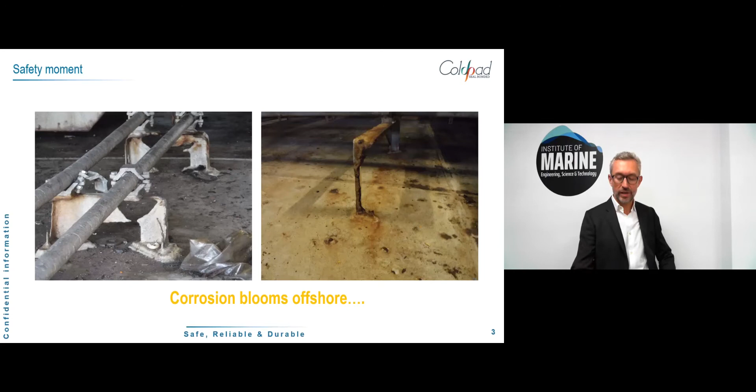First, let's start with the safety moment, which is purposely chosen to introduce our technology. It's about corrosion, and corrosion not in a simple place, but corrosion just above the crude oil tank of an FPSO. As you know, the crude oil tank stores crude oil. And if you need to repair it, it can be quite risky and quite a nightmare. So what to do in this condition?

You have different scenarios. The first one is you do nothing. A lot of our clients tend to do that, to postpone and procrastinate as much as they can. The good thing about that is it doesn't cost anything, but at one point it can be a bit tricky when the pipe is simply resting onto the deck, which usually leads to scenario 2, where you need to do something.

The classical and normal way of doing it is through hot work. So if you want to weld the pipe support onto a deck located above a crude oil tank, you usually need to empty the tank, clean the tank, and place some inert gas before being able to weld the support onto the deck. After that, because you've increased the heat, you need to do the paint touch-up at the top, but also inside. So you have to put in breathable air and send painters with scaffolding or rope access in order to get this paint job done.

The third option, the alternative, is doing it the cold way, meaning no hot work, and having a method which is reliable and acceptable to the industry to do it the cold way. And this is what we propose.

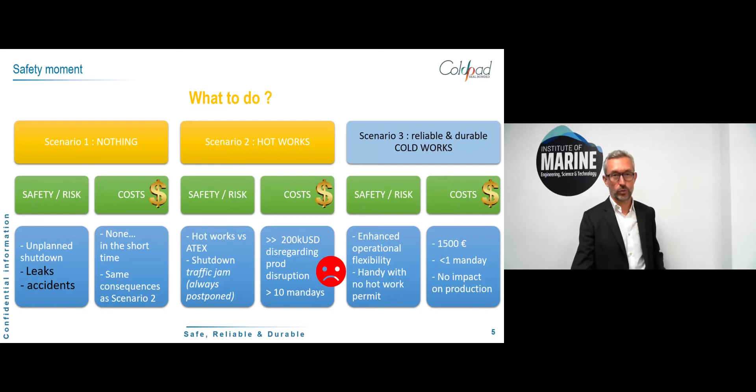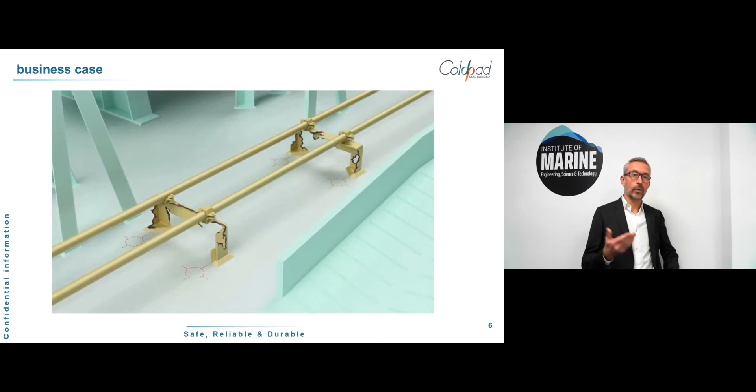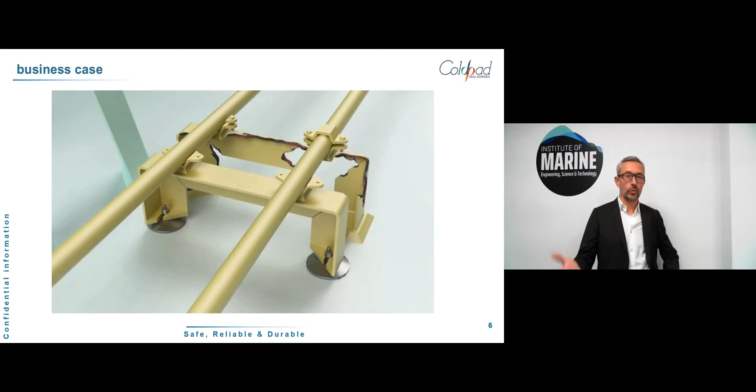So the business case for that is quite simple. It's the pipe support example that you've just seen. What we need to do is surface preparation. It's all about bonding, so we need to have the metal, the steel, bare naked with no paint anymore. Then we have this installation tool that I will talk about further. Then we install the ColdStud, what we call a bonded mechanical fastener, and then we bolt the new supports. We can leave or get rid of the old one, depending on the client's will, and then we have managed to fit new pipe support with no hot work at this location.

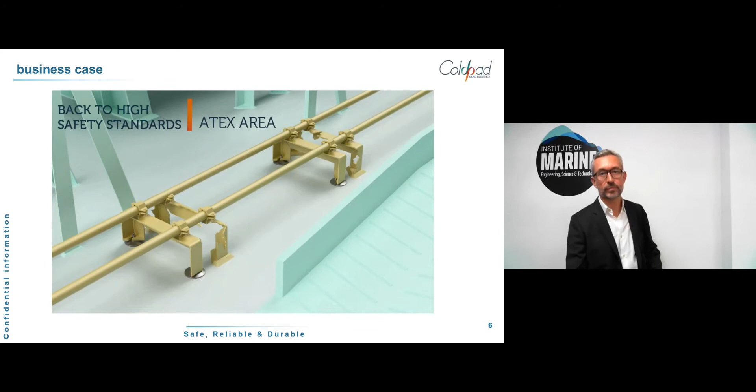So our DNA, our meaning of life, is to improve reliability of bonding. When you have fastening means or joining means, usually what's available in the industry is welding, bolting, or riveting. Well, it's all about introducing an alternative, a new way of joining two things, but with the same reliability level as these other classical fastening means. In this way, we can penetrate the market and actually propose our service to the industry that needs reliability.

So we have two products based on this technology. One is called ColdShield, a structural reinforcement dedicated to FPSO hull structure. And the other one is a bonded mechanical fastener, which is called ColdStud.

With this technique, the whole idea is to avoid hot work, to provide a cold solution, to address corrosion, leaks, fatigue cracks in the future, not yet now, and simple fastening. So our ambition is to shift structural maintenance, which usually requires some shutdown, either planned or unplanned, to general maintenance - a bit like when you do your painting job, you would be able to do some structural work.

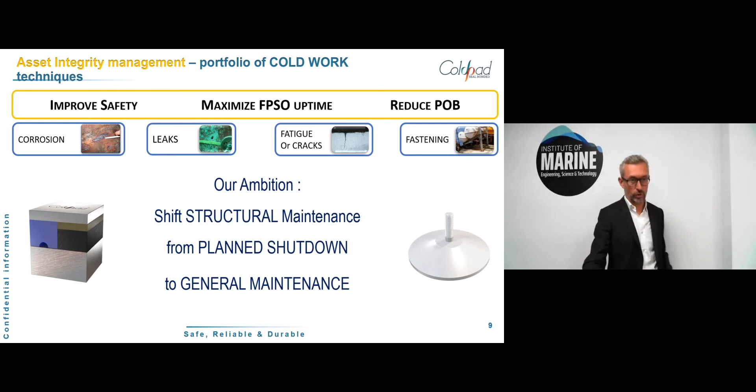So when we talk about reliability, we have conceptualized this reliability aspect for bonded connections. What is very important, what you must remember, is that bonding dislikes water. Water is one of the worst enemies of bonding in two stages: during installation and during service life.

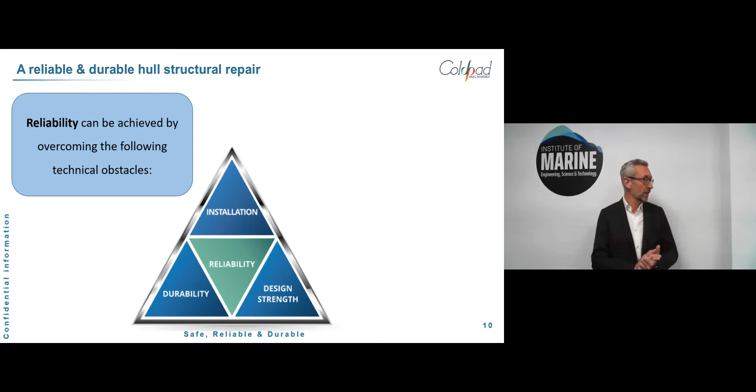Bonded composite reinforcement is widely used in aerospace industry and also in civil industry. What they do usually is in a warehouse where they control the atmospheric parameters. Ideally, you have to reach something like 50% humidity, lab conditions - that's the best for structural bonding. When you do civil engineering work with composites, you can allow up to 70% humidity level. When you are offshore, you are easily reaching 90% or 100% humidity with moisture, dew point, condensation onto your substrate. And this is where it gets tricky.

So what you need to have is to master the installation condition and especially the humidity level. This is key number one.

Key number two is durability. You have to make sure that water will not reach the bond line. Otherwise, you will have a degradation of your performance, which sometimes will occur and sometimes will not occur, meaning it will increase the scattering of the performance during the years. And increasing the scattering is actually the opposite of repeatability - it's increasing the standard deviation, which will affect your design strength.

And the last but not least is the design strength. We've made hundreds of tests and hundreds of numerical simulations to understand behavior, in order to optimize the performance.

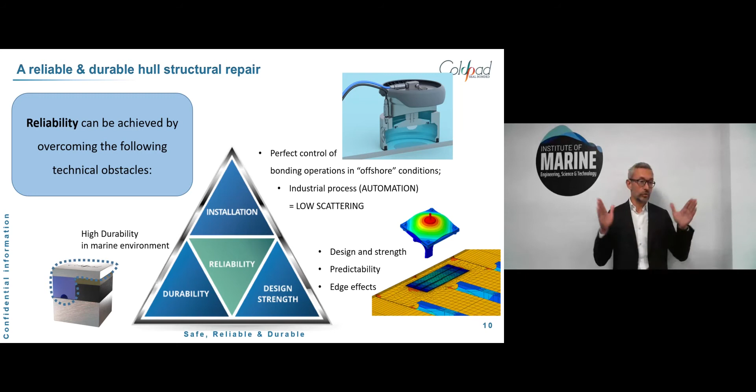So to summarize, you have to control installation and avoid humidity, ensure durability by avoiding moisture reaching the bond line, and last but not least, master the strength to avoid what we call edge effects, because usually the stress will be concentrated close to the singularity, typically at the edges of your assembly.

So, challenges in life extension. To give a bit of context on what we do: we can address structural reinforcement onto a deck, typically an FPSO deck, when it's heavily corroded. Class society will usually ask you to do crop and renew, a bit like what you have to do for a crude oil carrier. The thing is, it's a bit tricky to do that offshore when the FPSO is producing oil. And also, as I was telling you, tertiary structures such as pipe support and rail.

Now we are coming with a new product for deck plating, replacing a deck for local reinforcement, and other typical examples. So to summarize, when it's difficult for you to weld or to drill, this is where we are good. If you can weld easily or drill easily, there's no need to have a cold way of doing it, because it will be more expensive than standard.

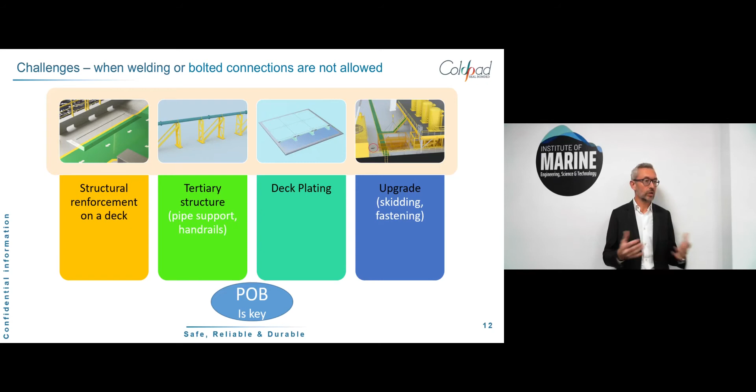Coldshield - so now I'm going to tell you a bit more about our first product. The adventure, the story, started in 2011 when an idea became a concept and a patent. I was working at Total, and I saw my colleague at Total and the French Petroleum Institute, and then we developed this technology over a few years.

So now the technology is mature enough to be certified by 4 class societies. It can address hull structure in general, flat structure, so deck, external hull, side shell, longitudinals, etc.

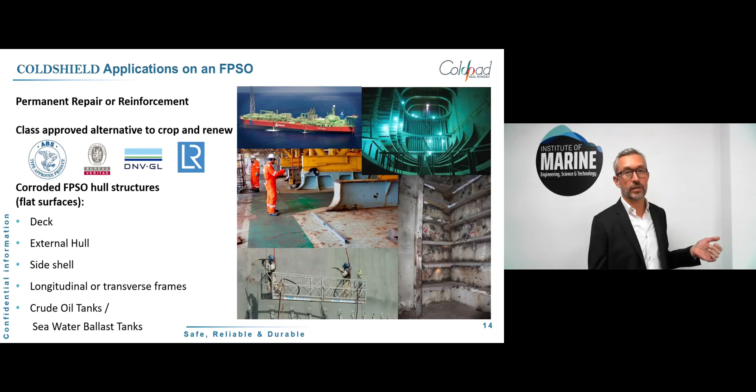It has been field proven. We've done 2 major projects - one for a major company, non-major in West Africa, and another one for SBM. We won the first innovation award in 2015, after 3 years of R&D. We spent more than 3 million in development and testing for that.

Okay, so how does it work? As I was telling you, you need to have an envelope, but also reinforcement. So first, the function is to restore the structural integrity and, of course, to protect against further corrosion.

What you could notice on that: the steel substrate, the base metal, is naked here, meaning that we have done the surface preparation before in order to make sure that we have good adhesion between the structural polymer, epoxy resin, and the reinforcement. So this is the structural reinforcement that you can see, which is made of a plate. It's the steel plate, the super duplex plates here, will be the reinforcement.

And there is also an intermediate layer that I will explain what its function is. And of course, you have to inject the epoxy, which is in dark color in that. So this is the structural reinforcement. The second one is the envelope. So we need, as I was saying, to protect against the water ingression, and this is how we do.

We have the envelope. This is a super duplex plate, top plate, so reinforcement, but also we have a peripheral seal, like a big O-ring that will be compressed and that will prevent the water from reaching the bond line. Okay.

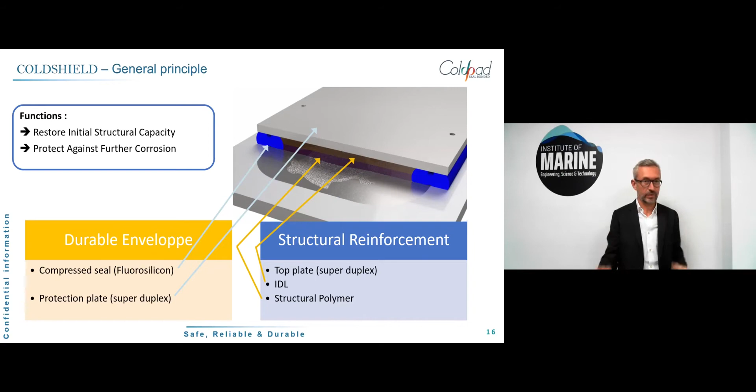So when we arrive, this thing will be prefabricated, so the seal and the super duplex plate and the intermediate layer will be prefabricated. We'll arrive in a blister, okay, and then we'll take up the plates, we do the surface preparation, and then we set this reinforcement onto the base metal.

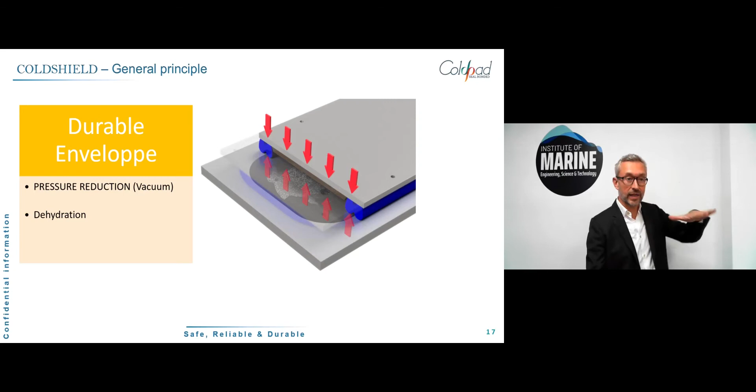And then what we do, we apply a pressure reduction, a vacuum, that will act like a vacuum cup, okay? So we have vacuum cup, and then we can isolate the internal volume from the external environment. And this is where we control the atmospheric parameter. And this is where we apply a dehydration in order to reach very low humidity level. When I say very low, it's less than 10%.

Once we've reached the desired atmospheric parameter, then we inject under vacuum the structural polymer, which is epoxy resin. And what is interesting here is that we take the advantage of the vacuum to have the seal compressed and to have the polymerization, the hardening of the resin while it's under vacuum. So the seal, which is compressed during the installation, will remain compressed for the whole service life.

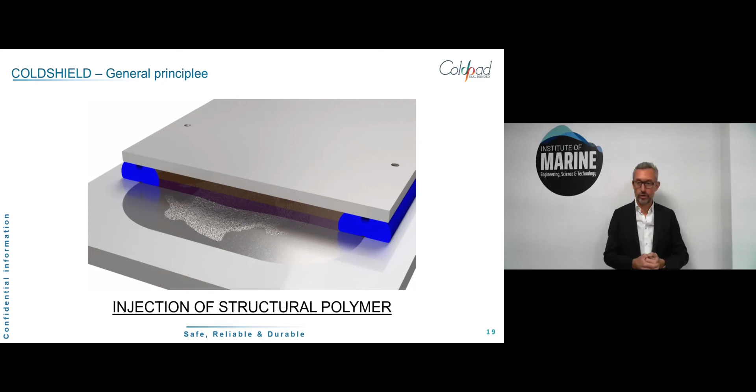The typical linear force is something like 1.5 ton per linear meter, so it's quite strong. And actually, the top plate is deforming due to the pressure difference. Okay. Now, how does it work structurally?

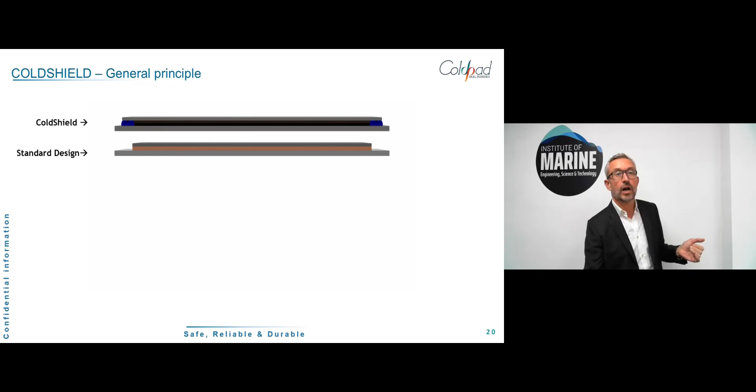So meaning that when you have a tension force in the base metal, then the force will be transferred into the reinforcement through the adhesive layer, okay? And it will be progressive. So it will take time, and this is what we call the anchorage length.

So all the force will go here, and so it will take time to have the reinforcing plate fully loaded, okay? And when the plate is fully loaded, it's acting like two springs in parallel. It will deform the same way. Meaning that the stress will be transferred mainly during this anchorage length.

And this is where it gets tricky for bonded reinforcement, or actually for bonded assembly, is to transfer easily the force or the stress from the base metal to the reinforcement in this short area. And what happens is, because of the geometry, you have like a discontinuity, and this is explaining the bathtub profile

of the stresses, right? So meaning that if you do a finite element analysis of this area and you refine the mesh, the finer the mesh will be, the higher the stress will be. Okay, because basically you're converging towards the analytical solution, which is infinite stress. And this is why a stress-based approach is actually a bit tricky when you are facing this. Usually, fracture mechanics is more appropriate.

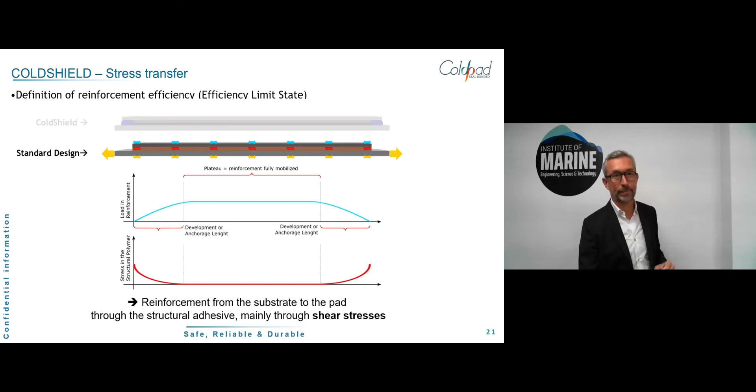Right. So what we have added, because I'm a structural engineer, I'm used to a stress-based approach. Fracture mechanics is a bit tricky and it's very difficult to actually control the order of magnitude. So what we have introduced here is this intermediate layer, an intermediate deformation layer that will deform sacrificially and that will actually reduce drastically this edge effect, so the stresses at the edge. And in that case, we have finite stress.

And finite stress will allow us to have a stress-based approach, which will be much more convenient and much easier to control. Right? And also, we improve drastically the mechanical capacity.

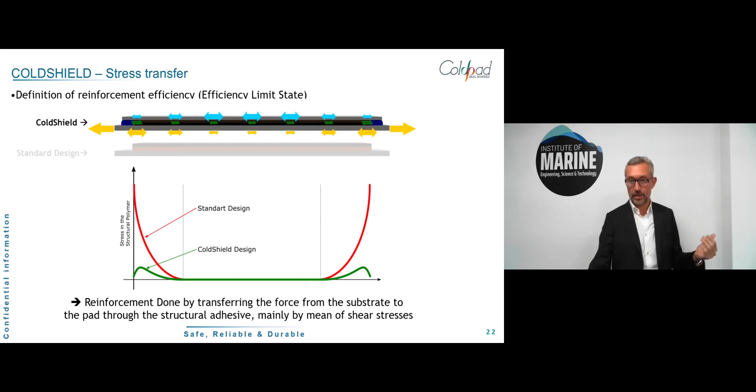And what we did is we applied this design to the midship of an FPSO, and we derived the design life in fatigue, and we arrived at 700 years of design life for a DFF, a design fatigue factor of 1. So meaning that even if you take the worst case, which is a safety factor of 10, we still achieve 70 years of design life in fatigue. Right?

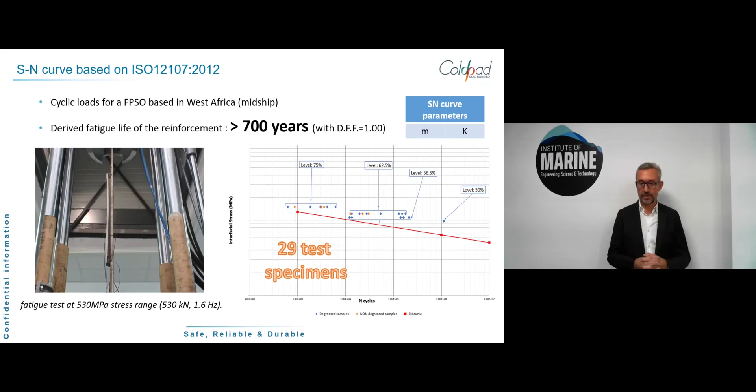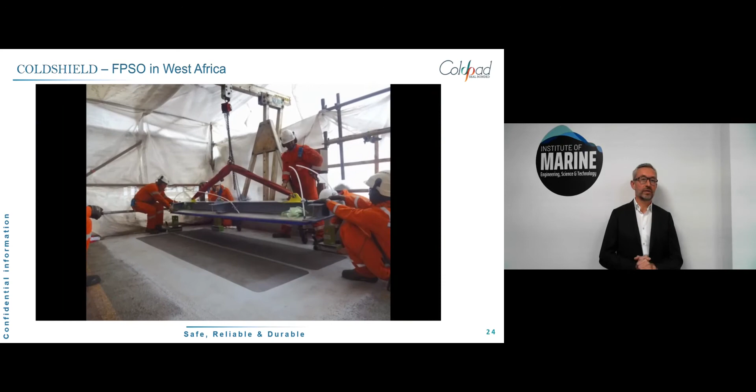So now, the project itself: West Africa, a big FPSO producing more than 100,000 barrels per day, with a corrosion level which is quite high and basically requiring repair. So we do the surface preparation, as you can see. Once the surface is prepared, we have the painting and the naked steel. Then we install the reinforcements, and we do all the process that I've shown you, meaning vacuum, dehydration, tightness control.

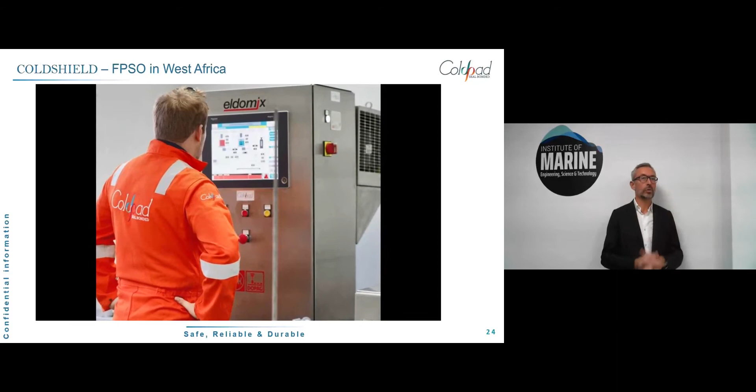You can see the seal, how much it is compressed, and then we use this robotic device to control all the parameters. What is interesting here is that every installation is done exactly the same. It's highly repeatable. We control all the parameters. It's always the same process, with the same vacuum, the same flow. And this is how it looks once it's installed.

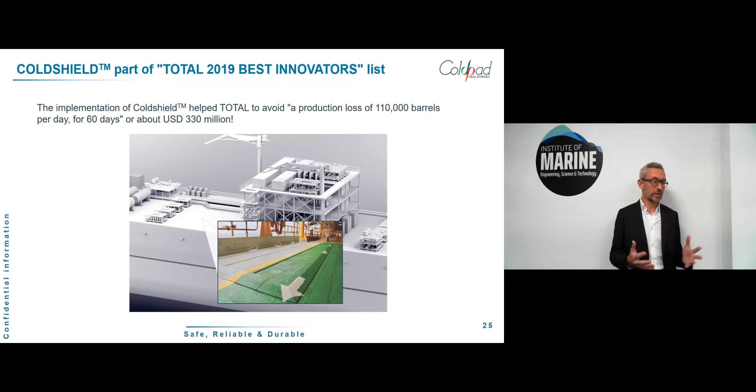So we were proud to be the Total 2019 Best Innovator, and to quote the article that they've shown on the internet, we managed to avoid a production loss of 110,000 barrels per day for 2 months, which is greater than 300 million.

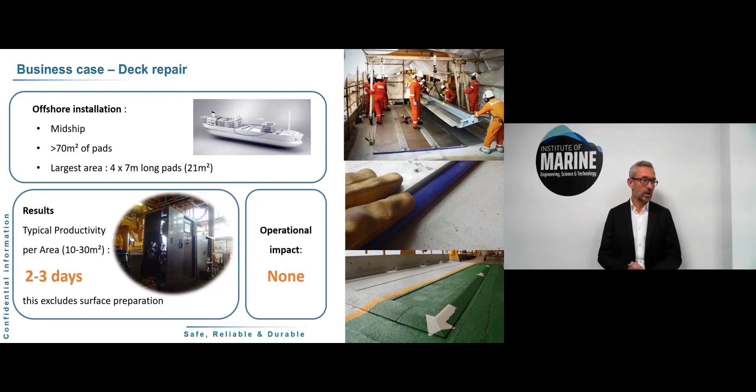So to give you an order of magnitude, for a campaign, we can install in one rotation something like 70 square meters, with the largest area to be treated being about 20 square meters. Typical productivity is about 3 days for an area, excluding surface preparation. Another example, bracket repair in West Africa for an FPSO. We also managed to avoid production loss.

What I will do is stop and take some questions before entering into the other product, which is a bonded mechanical fastener with other applications. If you have any questions, I will answer. Yes. Is there a maximum size plate that you can do? Yes, the standard is 10 meters long. 10 meters long. We have a production line.

And thickness as well? The thickness? Yeah. No, there is no limitation on thickness. Typical thickness is 12 millimeters. We have to be above 12 because if we go lower than that, when we do the vacuum, it will deflect too much. And can you butt two plates next to each other? We could, but it loses a bit of its charm because we need to do welding at this point. We are cold work, but we could do it, yes.

How would you get it off if you needed to do some more repairs in the future that require hot work? We didn't work too much on how to get it off, but we have some ideas. I will show you for the other product. We have a tool specially made to get it off. Here it is meant to be a permanent repair, yeah, but I'm sure there is something we can work on. Sorry, another question. Yes.

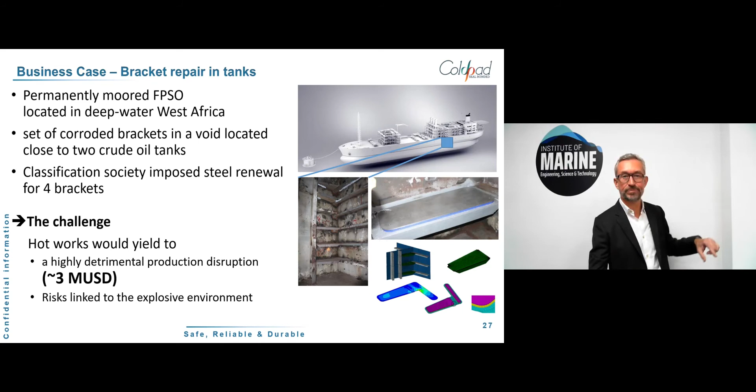Shall I go to the second part? Okay. No more questions, right? Yeah, I've got one more. Where you've got corrosion plates there, has there got to be a minimum thickness, because obviously if you're getting the vacuum there, you can possibly pull up and damage the original plate underneath.

Yes, that's right, if it's very, very thin. Usually we can go with pitting down to 6 millimeter remaining steel. 6 millimeter remaining from an original 12, so 50% diminution. Sorry, are you talking about the top plate? The reinforcement plate is 12 millimeters, the minimum that we require. This is a new material. Okay, but if you've got an 8mm plate originally, you can go down to 6mm.

We could go down. If I have 8mm, I'm talking about the base metal. The base metal, we need to have a remaining thickness of 6 millimeter, and if it's lower, we need to discuss with class and client if it's acceptable or not. It's on a case-by-case basis. And is that literally because you can pull up and damage the original plate? No, it's because we have to put a limitation. Class societies need to have a rule. And after, that's true.

If the remaining steel is very thin, it will be an issue for us. We are working on some spacers in order to minimize the deflection in between, but we need to qualify it. So there will be some possibility, but not yet qualified. Okay.

And then on the top plate, on what you said earlier about the vacuum, when you say the vacuum is so strong that the top plate can be sucked in? Deflect. It deflects. Okay, so it's not a flat deck. It's dishing, so to speak. Yeah, due to that. Usually the dishing will be lighter than the natural slope you will have for drainage on an FPSO, which is typically 5%. Okay?

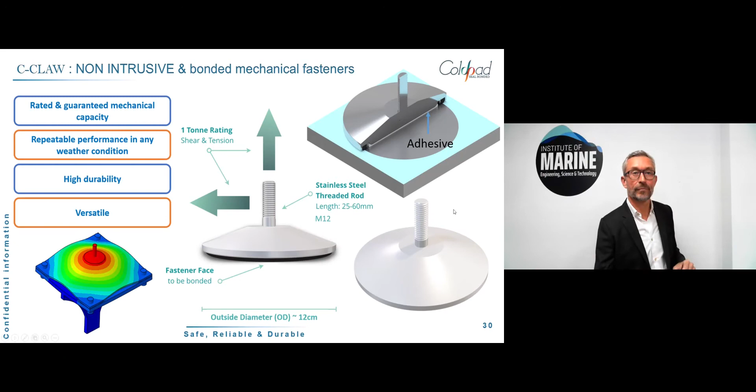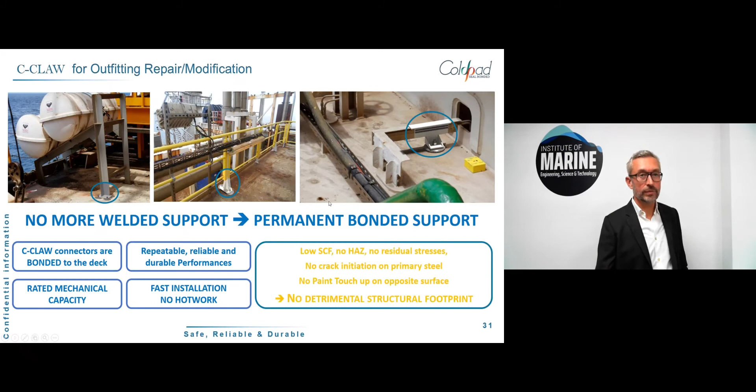So the idea is to use it for tertiary steel, where it's tricky, above crude oil tanks, for instance. And the beauty for a structural engineer or naval architect is that you will not have, or you have very low SCF compared to a typical handrail or doubler plates. There is no heat affected zone, there is no residual stress, there is no need to do some paint touch-up at the opposite surface. So basically it's transparent in terms of footprint for the base metal itself.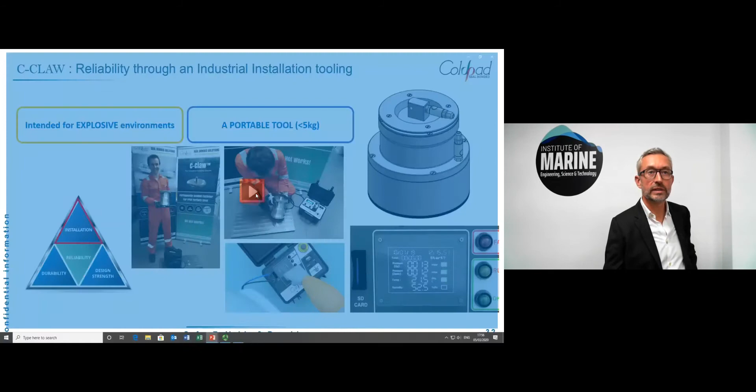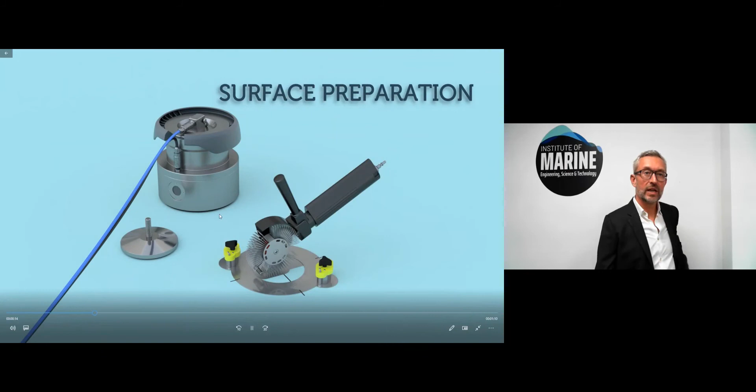So it's intended for ATEX environment, and I'm going to show you how this works. So we have a tool which is called C-HAWK, so it's an installation tool. So what you see here is the bonded mechanical fastener, C-CLAW, and here the tool is a control box, a bell. We have a surface preparation which is mandatory. Then we insert the fastener into the bell, and we dispense a quantity of adhesive, put it back, and then we install C-CLAW. From that, you don't touch anything, just push the button and everything will be done automatically.

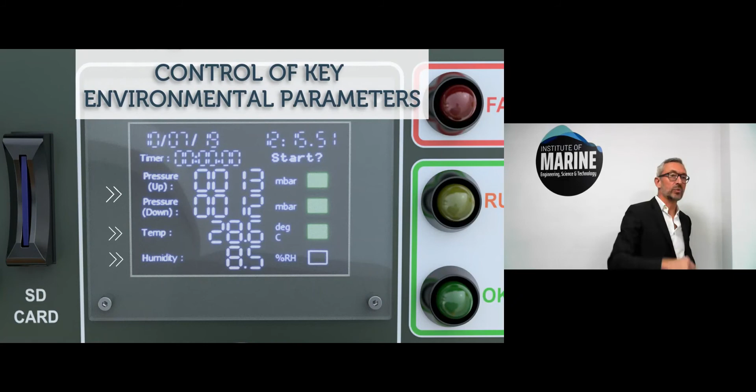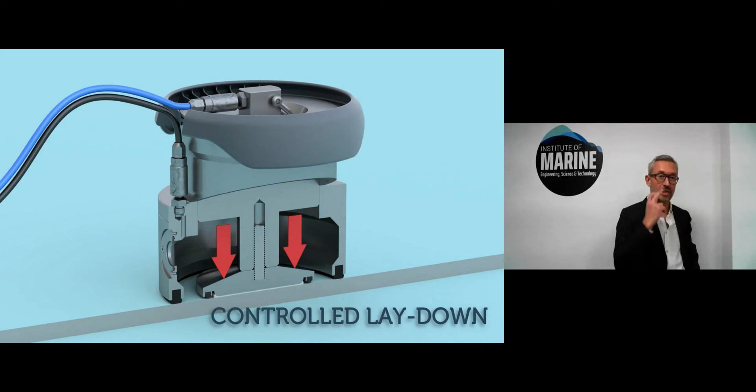So vacuum, dehydration, control of atmospheric parameters. Once you reach the atmospheric parameters that you need, such as 28 degrees and 8% of relative humidity, you can see the vacuum is quite low, then you do the descending. What is interesting as well is we can monitor every parameter, so we can have a full traceability. And then we have the laydown, we have the descent of the fastener, and still the compressed seal, and that's it. So remember, 1 ton mechanical capacity in tension and in shear. Cycle time is typically from 15 to 25 minutes, and that's it.

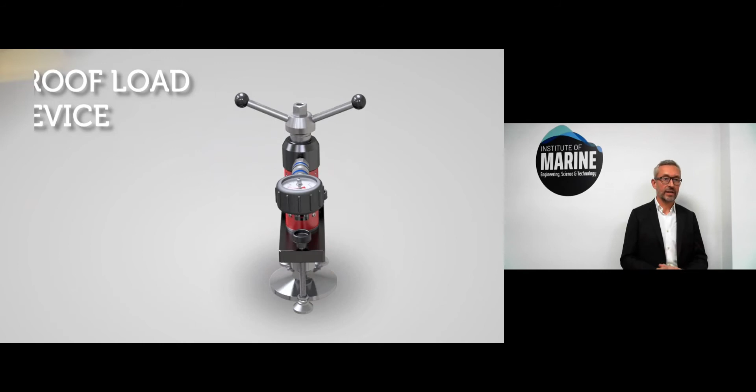So this is a C-HAWK. We have NDT. Typical NDT that we have is visual: we have a gauge that we will set onto the base metal and the C-CLAW to make sure that the seal is compressed to the required level. And after, for critical applications, we have a proof load test, which is probably the best NDT, because you demonstrate that the fastener is able actually to take the loads that you want. So we have a simple device that can be installed in a few minutes, and then you test it up to, let's say, 2 or 3 times the capacity, and then you can demonstrate that yes, it works and it will hold the load. So for handrail, for instance, this is what we will recommend before using it.

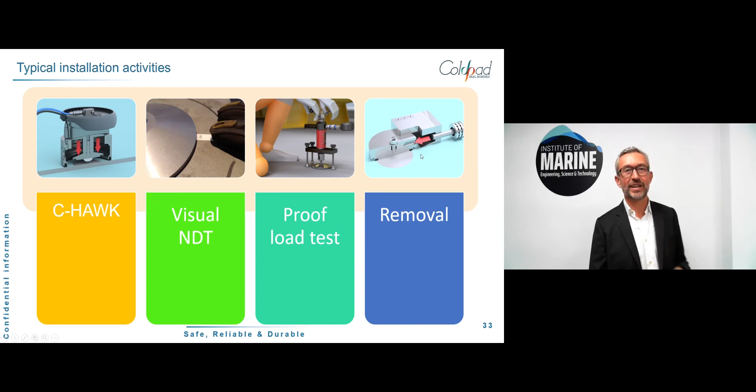And then removal. So one question was how do you remove the reinforcement? We tried to remove this fastener in the first place, so we took the toughest guy of our team with a big hammer. After half an hour, the hammer was damaged. The C-CLAW as well, but it was not removed. So we had to design something we called in the first place a guillotine, but it was a bit too French, so we decided to call it C-CLAW remover. That was more politically correct. So the whole idea is to insert a wedge in between the fastener and the base metal, and then it will force quite easily the C-CLAW off the base metal.

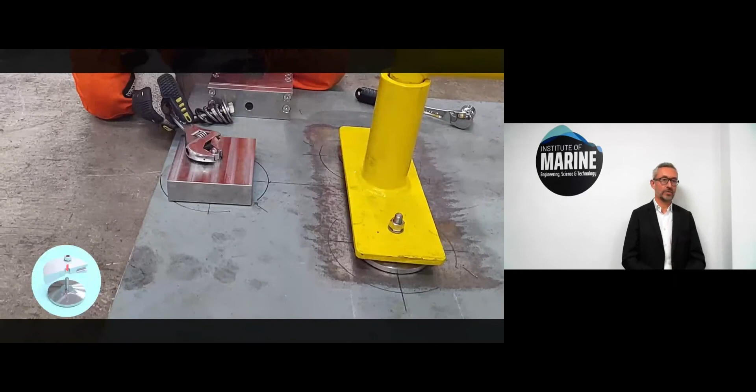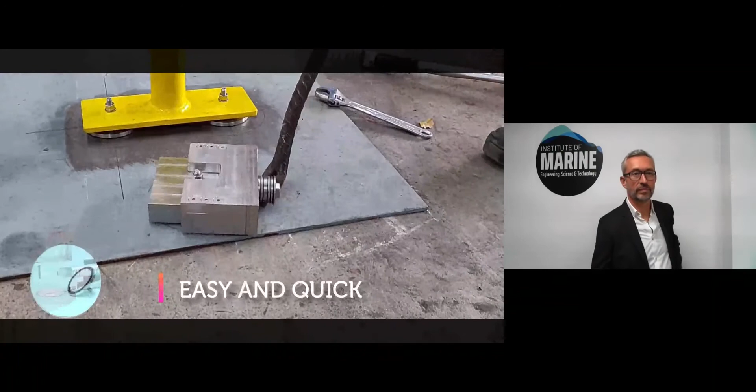When it says 5 minutes, it's probably exaggerated. 2 or 3 minutes is enough. So you can see the wedge is actually part of the moving part, and the fixed part is actually fixed onto the C-CLAW. That's it. So it's meant to be permanent, but on some applications, the clients want it to be temporary.

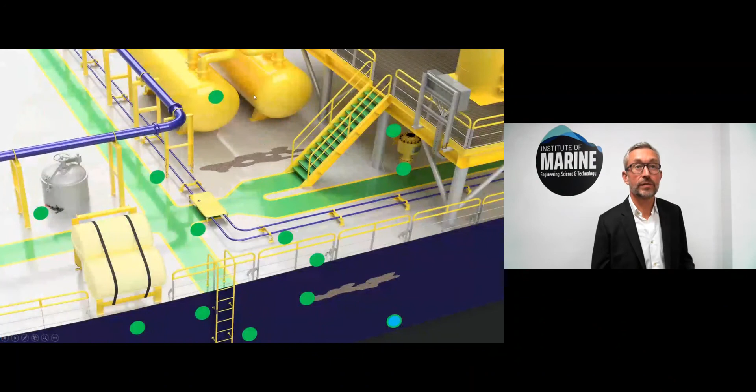Okay, so after there are many applications. So I'm going to show you a typical application. So here it was the top of a roof tank onshore, where a client needed to put additional handrail, and he didn't want to stop his tank. So it's easy, we can do surface preparation and do Cyclo installation and have the handrail installed.

So we can have different geometries. Sometimes you want to have the walkway clear of any obstacles, so we can have like a cantilever type, or semi-flush or compact type, or put that onto the kick plate which is existing. So different configurations are possible.

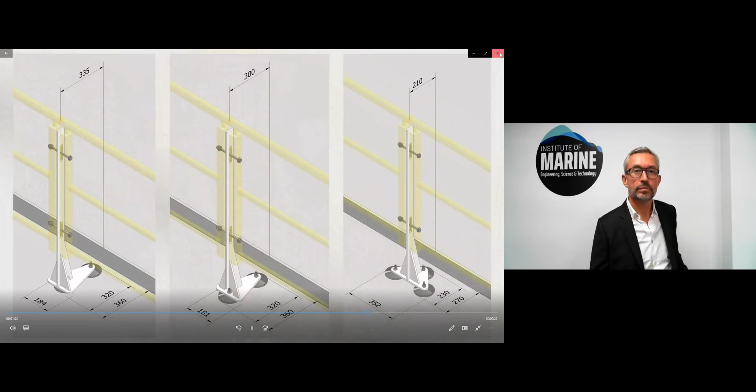Another application that I like is probably this one. I can see it here. Side shell. No, I can't see.

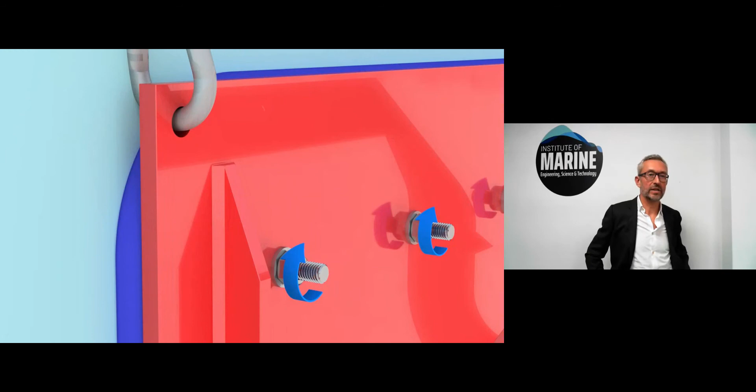So do surface preparation, still the same routine. Then you install, you do a proof load test. After, you have your typical interface plate. And then in order to avoid that it plays, you apply a load, and it's a bit like a balance. Basically, it's a stud. So which one is it? This one? Yeah, okay, thanks.

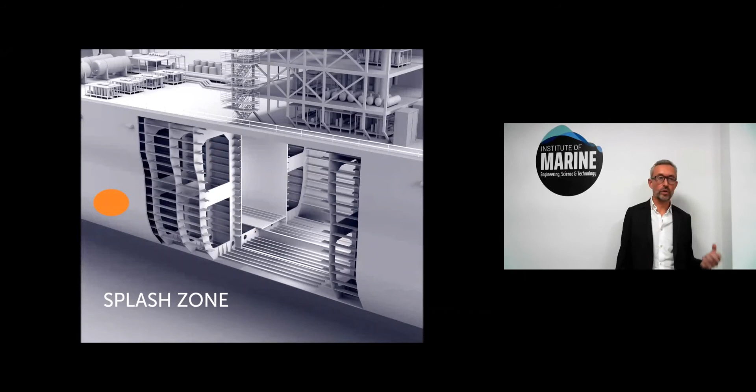So this one, a client had an issue on a side shell. He needed to replace, I think it was a small support. I'm not sure what it was about. The corrosion was quite heavy. He was not allowed to drill and not allowed to weld. So what we proposed is actually to make a simple support with a cantilever and to replace basically the function here.

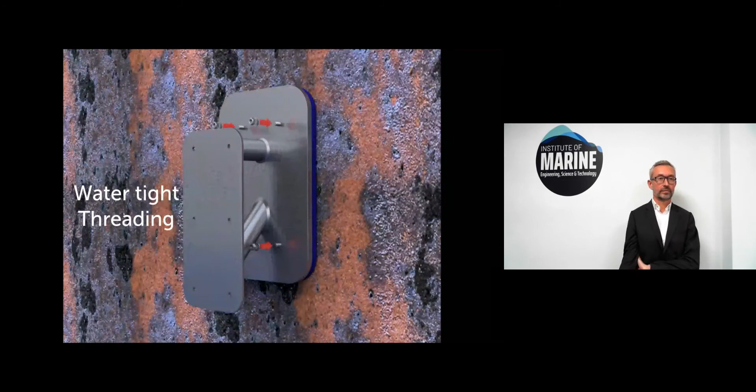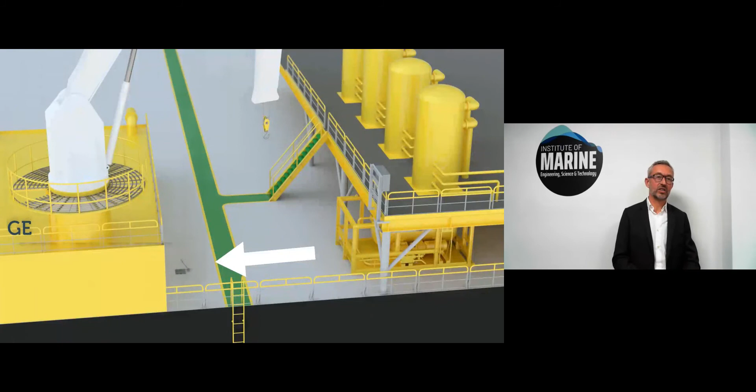And the last one, when you need an anchor point to pull a skid for removal, sometimes you cannot weld or you cannot attach to it or you cannot drill, and the solution is actually to make small anchor points for that. Still the same story: surface preparation, installation of cyclo, then a proof load test, and then you do the typical pad eyes, which will be connected to that, and then you will be able to pull a few tons.

If you have other questions, maybe I will treat it for you. Okay, installation guide as well.

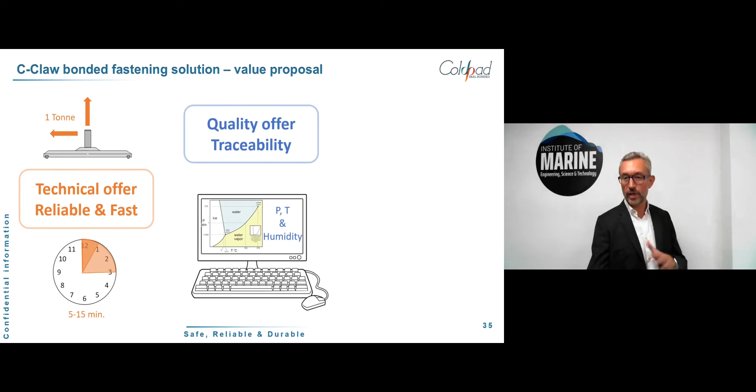So to summarize, quick installation time. We have traceability as well. We can have full traceability because we monitor every parameter, so we can record them, and then we can have an RFID link with the identification of the fastener and all its installation history. So if the client wants full traceability, we are able to provide it on the cloud, so it's painless for the clients.

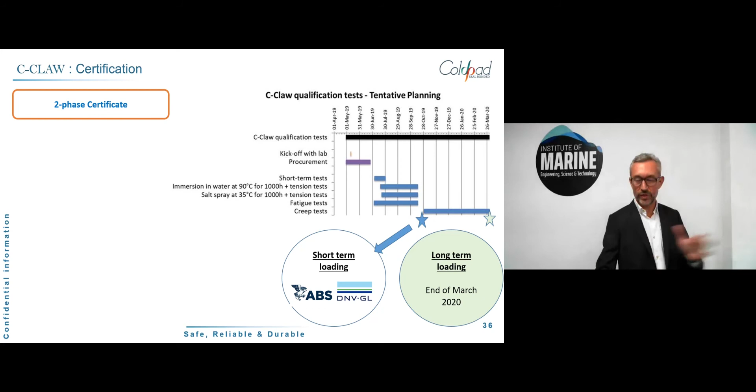We are having a certification process because it's a very new product. So we have the short-term loading, which is now terminating, and we are going to the long-term loading. Long-term loading is typically creep. It's a test that takes a lot of time, something like a 6-month test, in order to be able to extrapolate for a longer time. So this is why we wanted to segregate that, one for short-term and one for long-term.

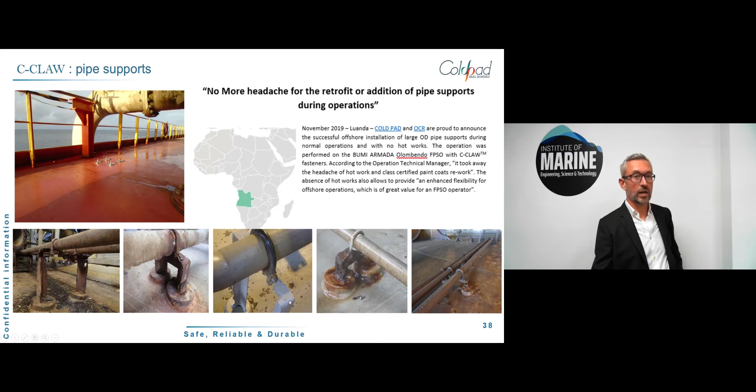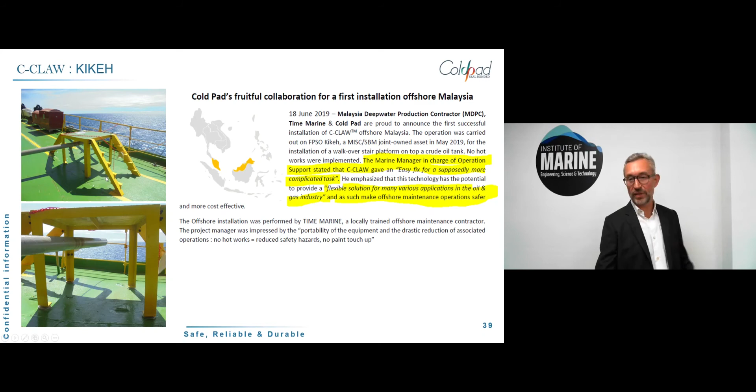Okay, so this is a typical C-Claw that we put for pipe supports that are badly damaged, and then we can replace them. That was our first job in Malaysia. It was a small platform where a pipe was actually clashing with the escapeway, so we needed to provide that. It was above a crude oil tank, so it was an ideal application.

Okay, typical deck upgrade. I think I wanted to have the video of this one.

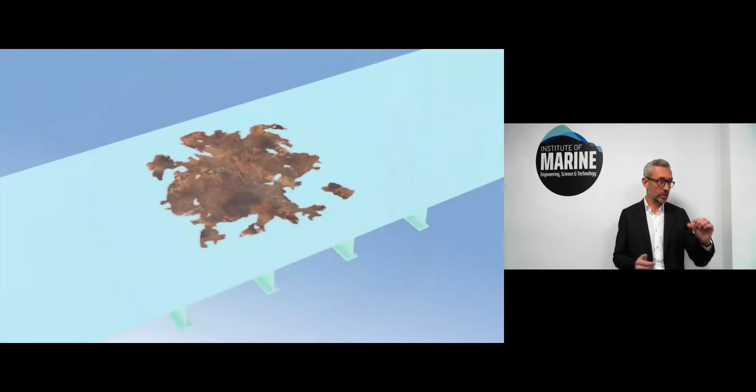Deck upgrade. So this is now for local bending. We were talking about hull girder strength; this one is a local upgrade. So let's say you're on a fixed platform or on the topside. You have in between joists a plating which is too thin to be used and would need to be replaced. We can double it. So it's like a doubler plate, but with no welding.

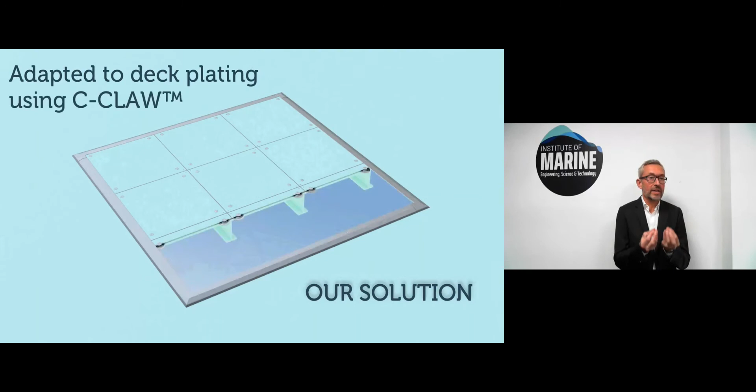So the solution is basically we will provide some supports very close to the joist, above the joist, and then we will bridge with a new plate in between the supports. So we still have the same surface preparation, we paint, and then we have C-Claw fasteners that we install at the dedicated locations. We can do the adhesive bonding. We can do the proof load test.

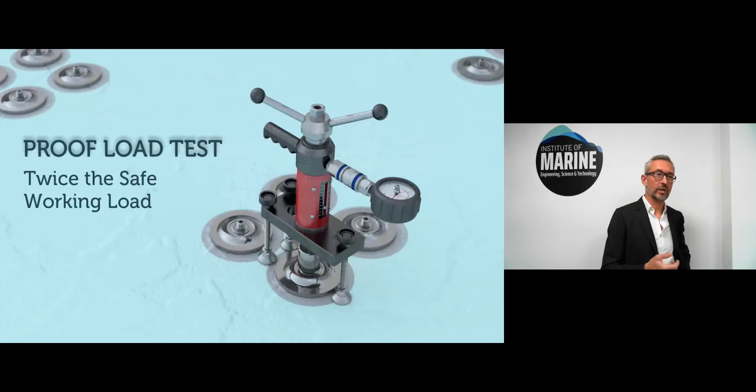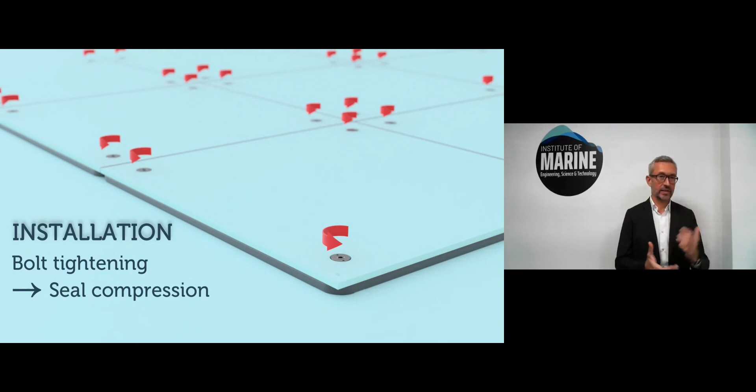And once it's done, we have some 1 meter by 1 meter plates, and then we install them. We have a sealing device to make sure that the water is not reaching underneath. We tighten them, so we compress the seal. So the seal is actually ensuring that the water is not getting trapped in between.

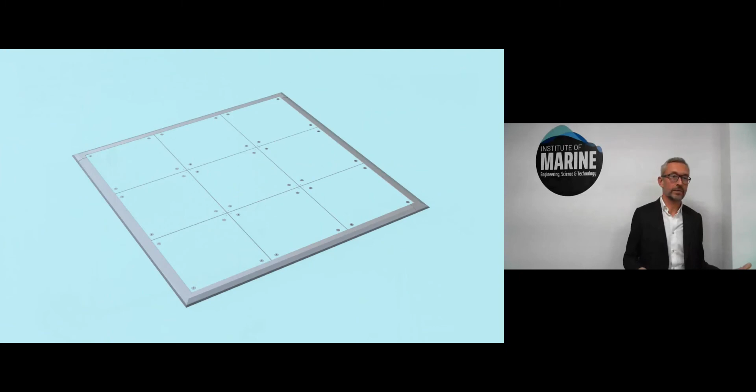But still it's inspectable, meaning that in 5 years' time, for instance, you will be able to open it quite easily and check whether there is some corrosion behind or not. And if there is some corrosion, you can do the paint touch-up and then put it back.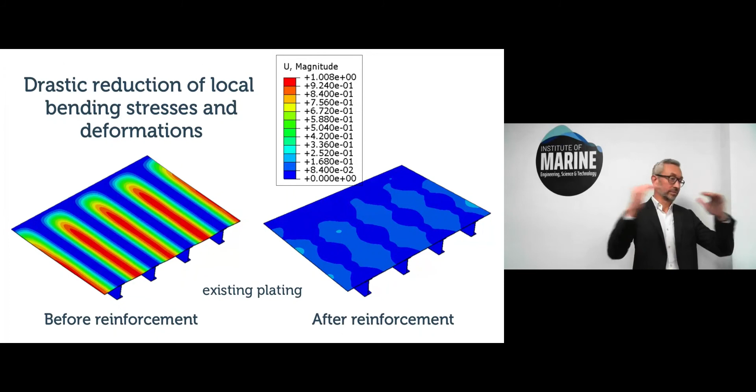So we make sure that it works at least engineering-wise. Of course, if you have a plate onto the top of a plate, you can take all the loads. You're relieving the existing one.

This one, container sea fastening. One client asked us, he has a problem when he puts a container, he needs to weld the twist lock. So we managed to design something which is twist lock, but bonded and not welded. So you can see the twist lock.

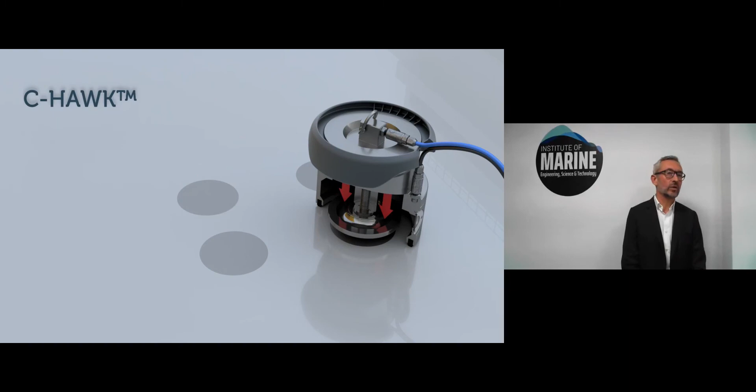So now I think you know the routine: surface preparation, installation with the tool, proof load test if required, and then you install the tool. Typically the capacity you have is 4 tons, and actually 1 ton per fastener for short-term loading is very conservative. If we pull on a fastener, usually the failure on short-term would be onto the threaded rod at 6 tons. So we have quite a conservative safety factor.

I think we are nearly finished.

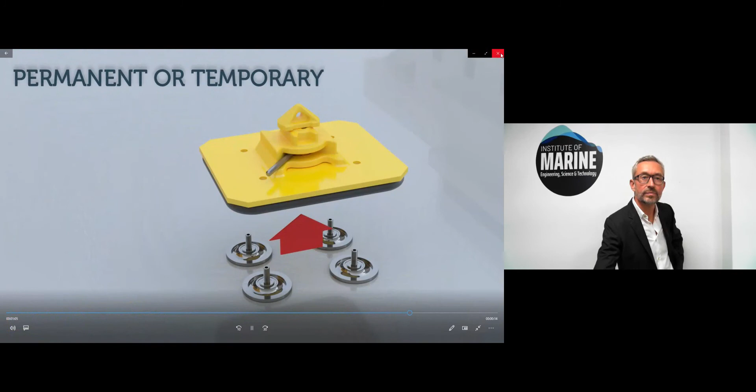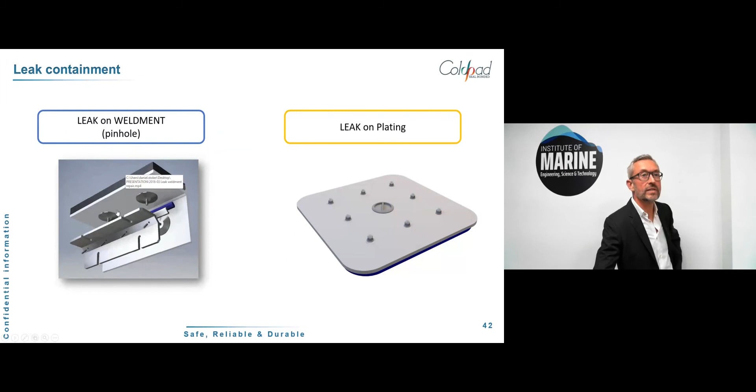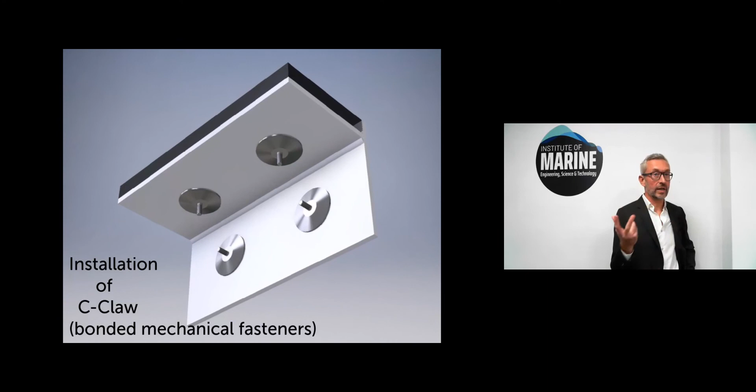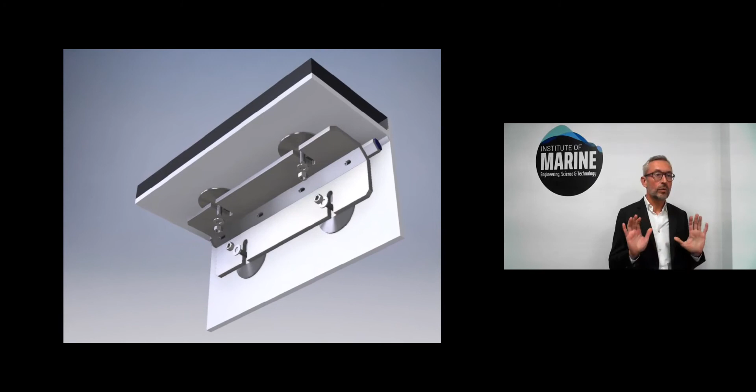And the last one is weldments. This is what we call an inspectable cement box. This is the concept, and after you will see a picture of the job we did in Indonesia for Exxon. So here there is a weldment, you have a porosity, you have a crude oil tank at the top, and the oil is leaking. So what we do, we install 4 anchoring points, and then we have a device with a blue seal, a fluorosilicone, which is very durable in contact with hydrocarbon, that we force onto the porosity.

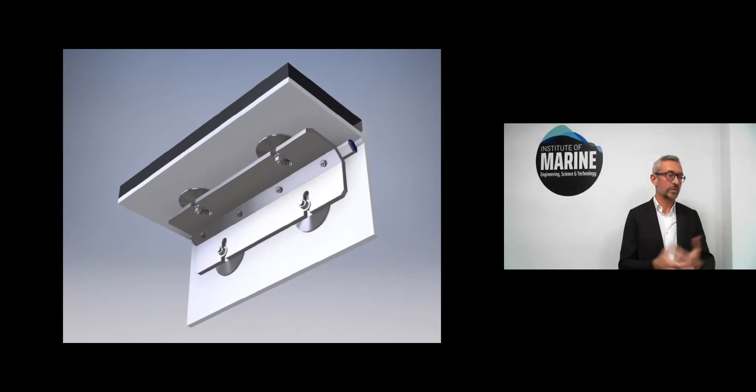And here we develop contact pressure which is sufficiently high to stop any leakage. The good thing here is it stops the leakage, it's cold work obviously, and it's inspectable, meaning you do not need to destroy the cement box to inspect it — you just need to undo the bolting and inspect the porosity to make sure it doesn't become a crack or something. Usually the class society likes the idea.

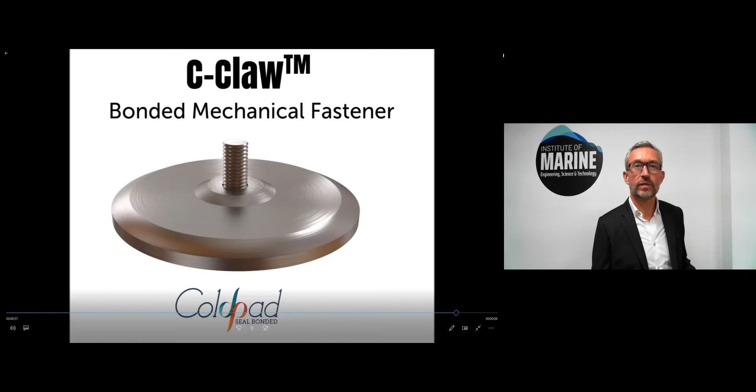So this is what we done for Exxon. It's a bit different, but it's the same principle. We have anchorage points here to C-Claw, and then we force this part, and we squeeze the blue seal, made of fluorosilicone, which prevents the oil from leaking.

So we did a mock-up for that in the lab, where we applied delta P with a gas, which was twice the actual pressure heads that we did. It was working very well, and we applied that in life, and it was inspected, and it works perfectly. The good thing is, even if the permanent status is usually difficult to get, the fact that you can inspect it means if everything is fine, you put it back and extend it for 5 years or whatever the inspection pace is, up to the end of the life of your asset.

And finally, this is something we are working on. We've already completed 1 ton. It's what we call 10, 100, 1000 — we want a demonstrator that can go from tertiary steel to primary steel using a combination of C-Claw. So we did 1 ton, obviously we completed that. We did a 10 ton capacity, and we managed to reach more than 25 tons by combining 4 C-Claw together.

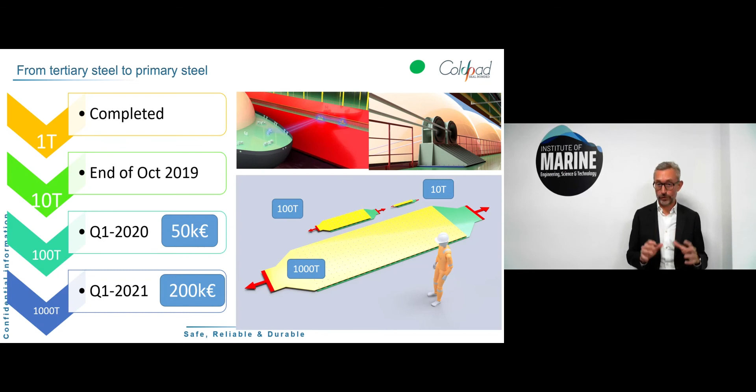And the next step will be 100 tons, and the step further will be 1000 tons. Already at 100 tons, I'm sure this is a world first to transfer 100 tons through a bonded connection.

The good thing here for the 10 ton capacity — we demonstrated we could achieve 10 tons. After 18 tons, we had a failure of 1 C-Claw, but not in the bonded line, in the threaded rod. But the fact that we had a failure on 1 of 4 didn't generate a catastrophic failure — it stopped, it was a crack stopper, because all the load was taken by the 3 others. We could go up to 25 tons, and at 25 tons we needed to stop the test because we reached the maximum capacity of the testing machine.

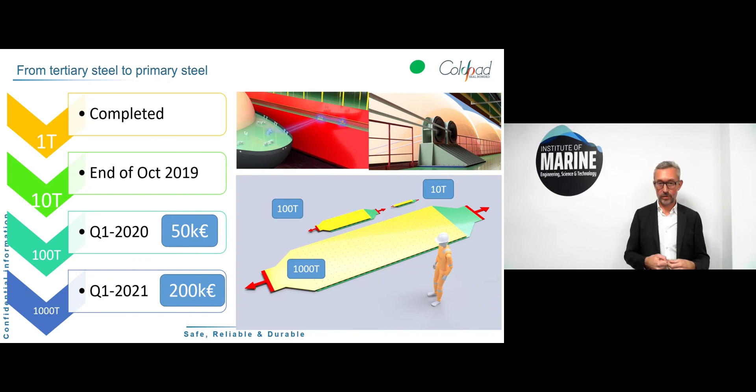So we are very confident for the 100 and 1000 ton targets. And I think that's it. So I will be delighted to answer your questions.

Have you conducted any aging tests on the seal? Yes, for the first products, definitely. We have done accelerated aging tests, meaning we placed a mock-up of the seal with reactive powder, so it changed color if humidity detection exceeded 50%. We placed them for 3 years at high temperature, 60 or 70 degrees, with frequent inspection, and with Arrhenius law you can do extrapolation.